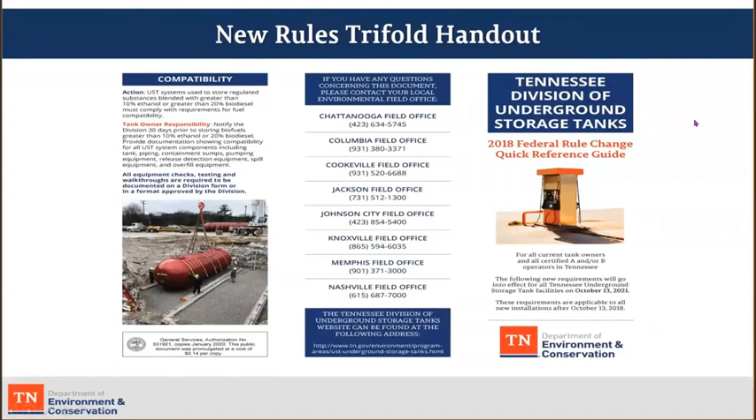We also created - you may have been handed out one of these during an inspection, or we're seeing this one too - it's a trifold handout. It was just kind of hitting the points of what's new and what your requirements are. I know you can't read that, but if you want a copy of this, we'd be happy to give it to you. It's also under the new rule tab on our website.

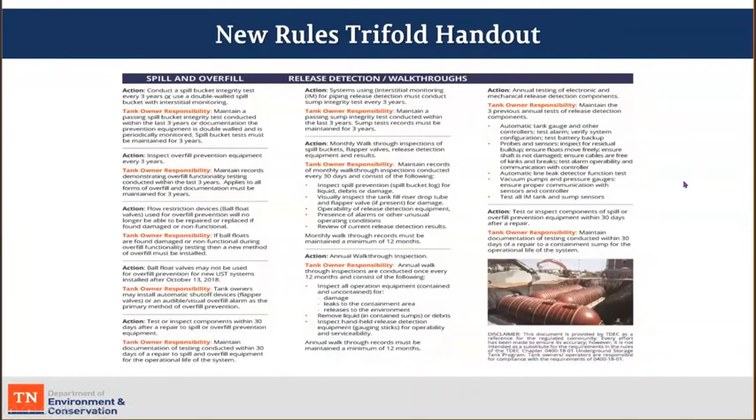Before we get started going through any pictures, we have to say a disclaimer: the State of Tennessee does not endorse any specific brands, manufacturers, vendors, products, or services. So anything we're using, for example, is just an example. We're not putting our name on it.

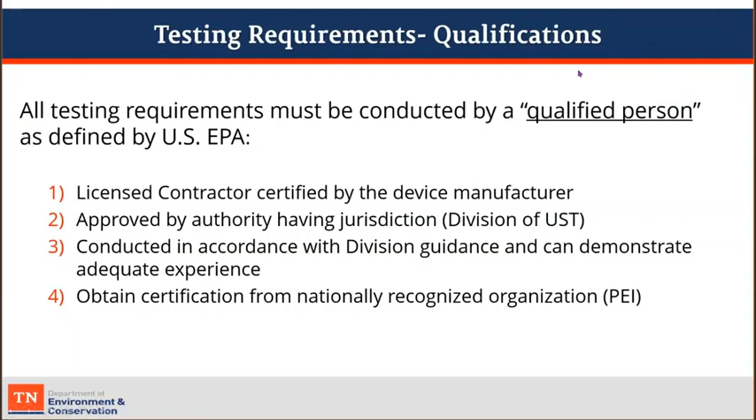All the testing we're going to refer to, all the new testing requirements, the qualifications for the person to do the testing - it must be conducted by a qualified person. That's defined by the US EPA as a licensed contractor, certified by the device manufacturer, approved by the authority having jurisdiction - that would be us, Division of UST in Tennessee - conducted in accordance with division guidance, and can demonstrate adequate experience, or obtain certification from a nationally recognized organization. PEI is an example, Petroleum Equipment Institute.

So, spill and overfill prevention devices - what is new? For spill prevention equipment, your monthly walkthrough inspections were already kind of like a monthly spill bucket inspection. There are some new items added to that for the complete monthly walkthrough inspection. There will be 3-year spill prevention equipment integrity testing. For overfill prevention equipment, there's also a 3-year overfill equipment functionality testing requirement.

For record-keeping requirements, briefly: the monthly spill prevention device, spill bucket walkthrough inspections, will be maintained for 1 year. For the 3-year testing for spill and overfill devices, those will be maintained 3 years. So you'll keep it for the 3 years, then you're doing another test and you maintain that one for the next 3 years. For double wall spill prevention equipment, monthly monitoring results must be maintained as long as this method is in use.

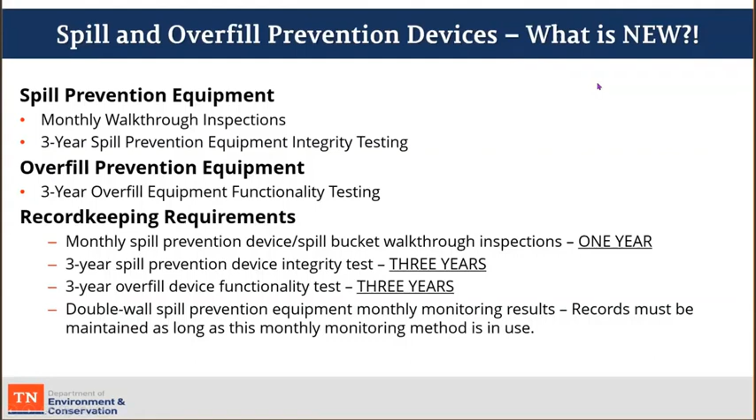For review, your spill prevention equipment is required to prevent the release of product to the environment when the transfer hose is detached from the fill pipe, catching any drips or small spills that may occur during delivery. The spill bucket must be installed on all USTs with a product transfer volume greater than 25 gallons at one time. This equipment is not manufactured or designed to contain petroleum product for long periods of time - it's just to hold that spill until it can be cleaned out.

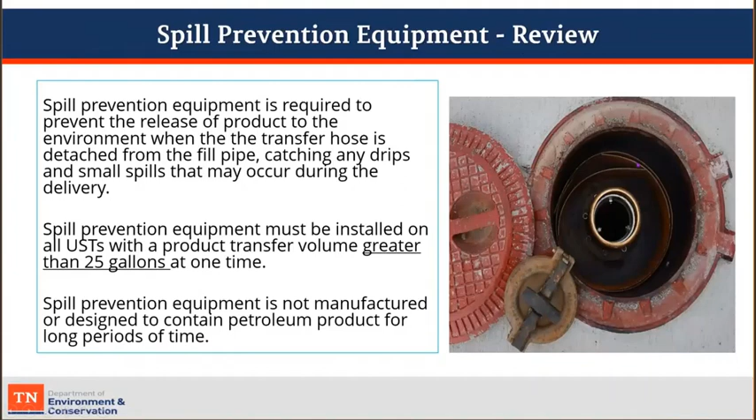Another example is an all-in-one STP sump as your spill prevention equipment - it may not just be a simple spill bucket. In this one, your fill port is actually located with some transition piping here, and it looks like your tank probe is in there too. So this entire sump would be considered the spill prevention device.

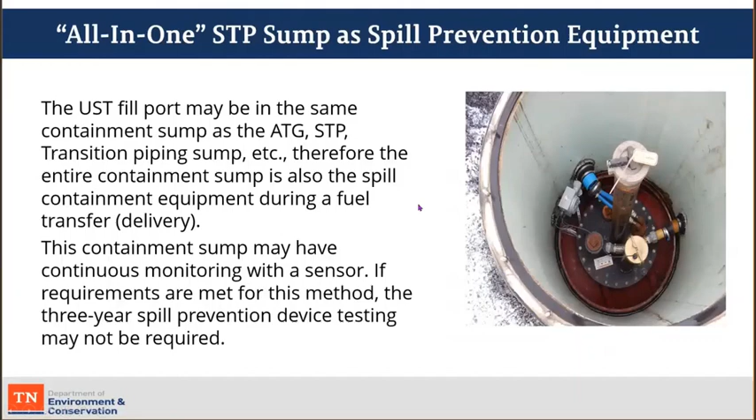This is some alternative spill prevention equipment. Different sites, different types of facilities, this may be the type of equipment they need to use. This one is in a vault. These are like a bermed area, a bermed surface area around the fill area. They must be compatible with the stored product and not allow a spill to be released to the environment. Monthly inspections are required for this type of alternative equipment, and any damage must be repaired or replaced.

And this is important. These might be located near something like an oil water separator, maybe at a truck stop or a bulk plant, or storm drains. These might contain less and be more of an opportunity to become a pathway for any spills or overfills to get into the environment.

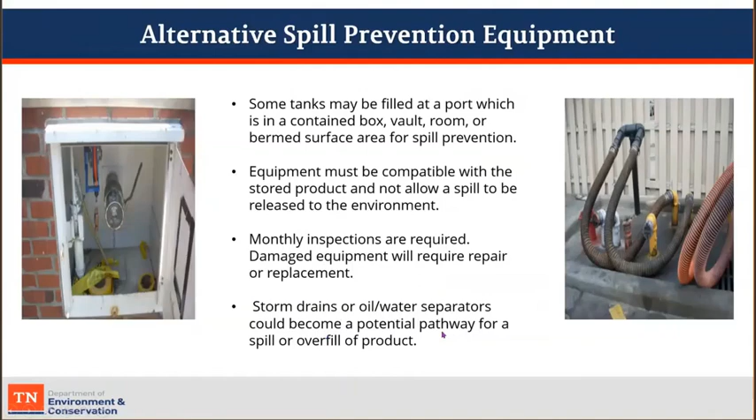Another type is the spill bucket. They have a drain back valve, so this drain is installed. The intent is, if product from the hose is in the bucket after the delivery, you could drain that product back into the tank instead of having to remove it another way. But if the spill bucket is not maintained clean, with no debris and no water, that can cause problems with water getting into the tank. And they should not be used, especially for fuels that contain ethanol. The potential for water to enter your tank could lower the quality of the fuel.

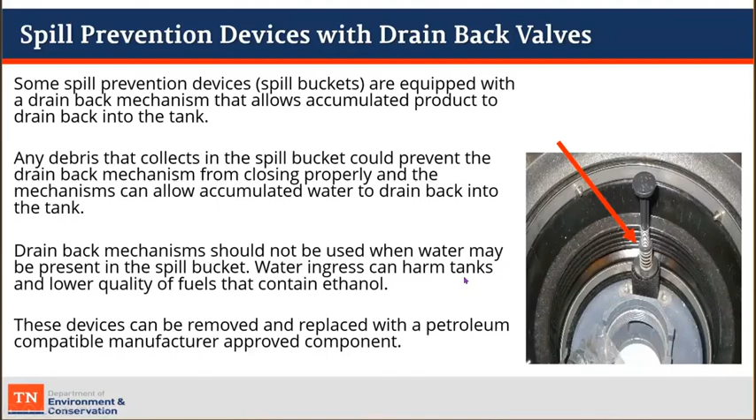For repairs, these can be removed and replaced with a device, a petroleum compatible approved component by the manufacturer. So kind of like a plug. But once it's plugged, it has to stay plugged. You can't take it out, plug it to test it, and put it back in.

So for the monthly walkthrough inspection, a new requirement for all spill prevention equipment, you will be visually checking them for damage, removing all liquid or debris. You're going to actually look down in the fill pipe and check for any obstructions, say a stick might be down there to bypass an overfill device. Just make sure there's no obstruction, and you'll be checking your fill cap. Make sure the seal is on it, it has a tight seal, and it sits securely on the fill pipe.

And for the double wall spill prevention equipment, if it's interstitially monitored, you want to check for a leak in the interstitial area, and that's done monthly.

So for the record keeping on the monthly walkthrough for spill prevention equipment, it's going to show a list of each area checked, so each spill bucket, maybe by product, whether each area checked was acceptable, or if it needed action taken. You're going to describe the action taken, say there was water, I removed the water. For double wall spill prevention equipment, you'll keep maintaining the monthly sensor status and the monthly alarm reports if it's monitored with a sensor in the interstitial space.

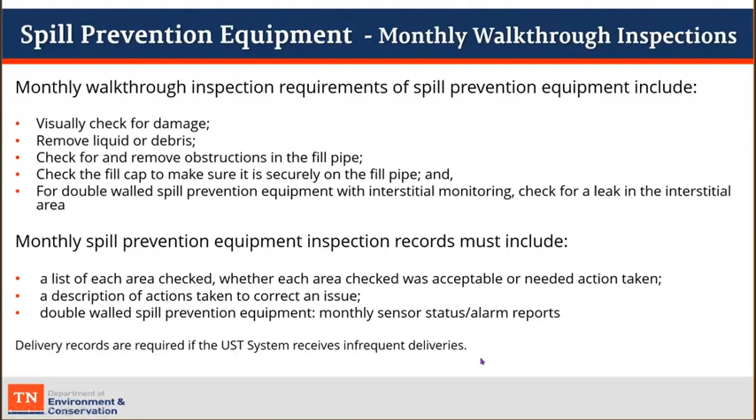The 3-year integrity testing on spill prevention equipment: single wall spill prevention must be tested at least once every 3 years to ensure the equipment is liquid tight, by using vacuum, pressure, or liquid testing. And the liquid testing is the most frequent, it's a hydrostatic test.

Double wall spill prevention can be visually inspected every 30 days or monitored with an interstitial sensor. The visual inspection would be, some of them have a little gauge, like a vacuum gauge at the bottom, you could visually look at that every 30 days, or you're going to use that sensor for continuous monitoring. Again, records for the double wall spill prevention monitored with that sensor must be maintained for as long as the equipment is in use and using that method. So we'll be looking at the monitoring records and documentation that the manufacturer's spill prevention device requirements are met. If you choose to discontinue sensor monitoring of that double wall spill prevention device, you must conduct the integrity testing within 30 days.

Yeah, I have a question. Okay.

This is from David McCaney. There was a comment about the spill basin drain: if plugged, could not be removed to test. I didn't understand that reference.

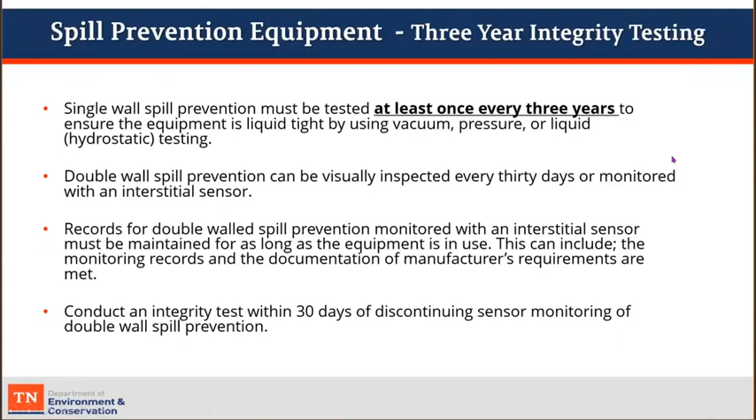For the hydrostatic method, which is the most common method of testing the spill prevention equipment, these instructions are from our division's technical chapter of our standardized inspection manual on spill and overfill prevention. Other testing can also be conducted in accordance with the PEI, Petroleum Equipment Institute, their RP 1200, Section 6.

The method would be: before testing, you're going to need water, a tape measure or measuring stick capable of measuring to 1/8 of an inch. You might want to use spray paint or a marker so you can see where you marked. You must clean out the device, make sure it's empty, very clean.

Make sure any drain valves are completely closed. If it doesn't seal properly and you know it, that's where you could repair it, or remove it and just not use that drain valve. But if you want to keep it, you have to repair it and test it with the drain valve installed. Those are a common place for a failed test—they could have debris under it causing problems.

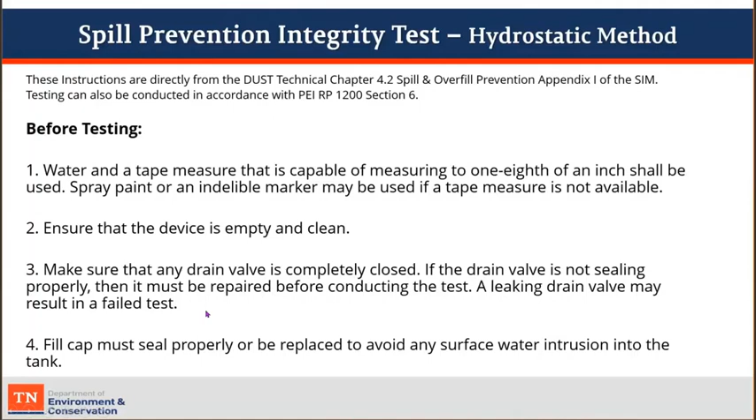Your fill cap must seal properly. That's important—got the seal tight on top of your fill port. You want to be sure to replace that if it's not, to make sure none of the water gets into your tank during testing and in the future.

For conducting the test, you're going to mark inside the spill bucket a level just slightly below the top of the cap on your fill riser. Fill the spill bucket to that level with water, and allow that water to stand for a minimum of 1 hour. After that hour, measure the difference of the water level using your tape measure, to the nearest 1/8 of an inch. Then empty and clean the spill bucket.

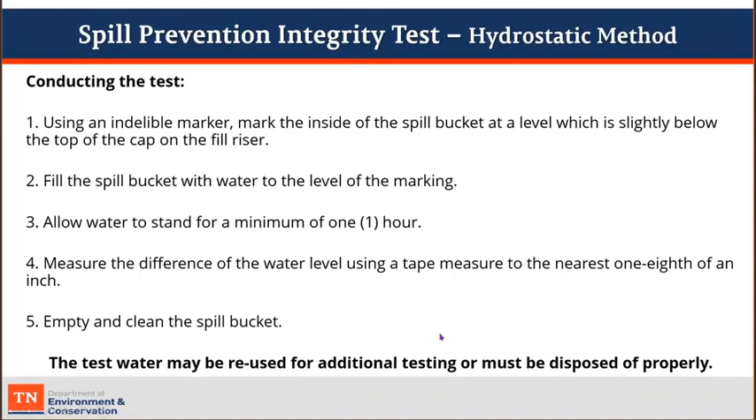The test water can be reused on site, or it must be disposed of properly. If the water level decreases by 1/8 of an inch or more, the spill bucket fails the test, and at that point you determine if the spill bucket can be repaired—manufacturers have that in place. If not, it must be replaced. If the water level change is less than 1/8 of an inch, the spill bucket passes the test.

The division has a form for our spill prevention device hydrostatic test report, Form CN 1366. That's just a picture of it, but it's very small. If you'd like to have the form, it's on the website, or we'd be happy to email that to you.

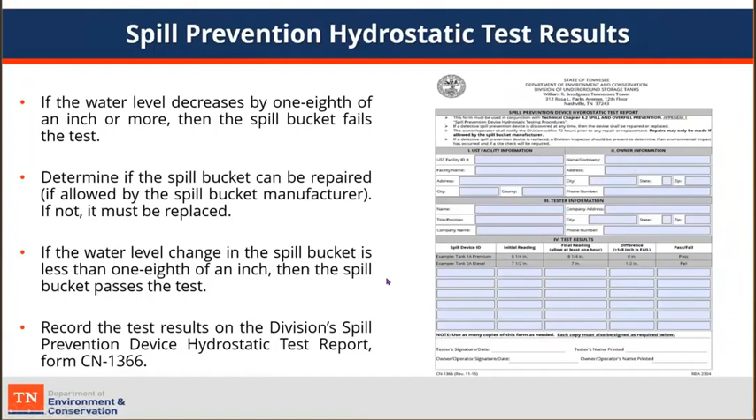Another method for the vacuum method, this is less common, but it can be done on a single wall or double wall. The device manufacturer has the vacuum testing kits. You definitely want to get with the specific device manufacturer for their procedure and their test times.

PEI has some standards here for single wall spill bucket: your initial is 30-inch water column, your end result 26 inches or greater is a pass. So that's their tolerance. For the double wall, the initial is 15 inches water column, end result of 12-inch water column or greater after 1 minute is a pass. So this is a faster test, but it takes a lot more equipment.

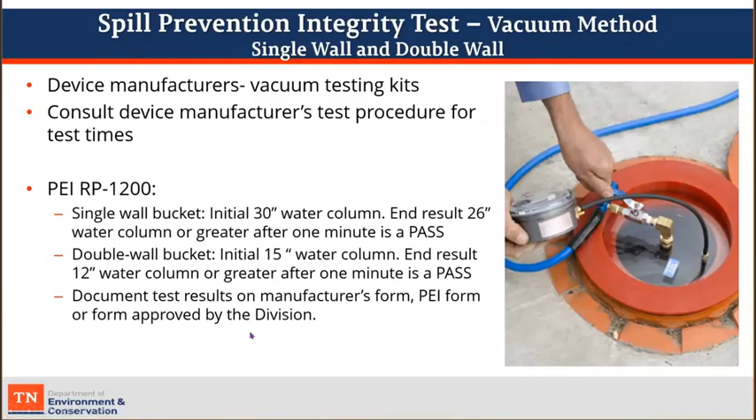And you document your test results on the manufacturer's test form, a PEI form, or a form that is approved by the division.

As far as repairs on spill prevention equipment, some spill bucket manufacturers allow spill bucket retrofit repairs. There's some that are being manufactured now, so in the event you do have to replace or repair, it's just got that inner wall, you can just take the inner wall out and replace that. That way you don't have to break concrete to replace the entire spill bucket.

And if you do repair, it must be fuel compatible, no field applied coatings or patches, no flex seal. You're going to check for UL approval, or contact us to make sure what repair you want to do, and we'll let you know if that's going to be approved. After any repairs, the spill equipment device must be integrity tested within 30 days of the repair.

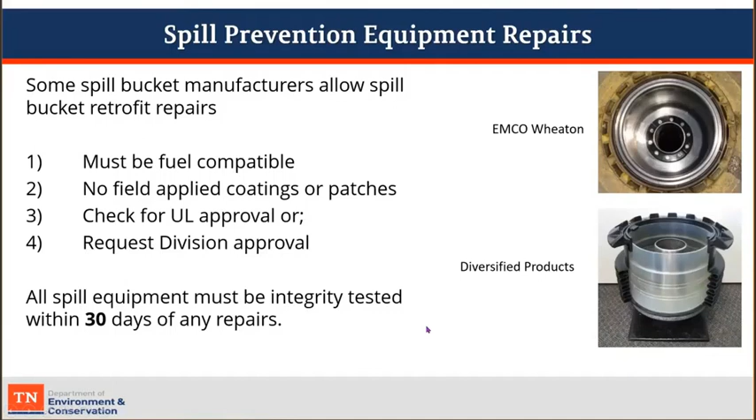Also, if you want to look up other types of methods to test the spill prevention devices, the National Work Group on Leak Detection Evaluations, you can always check this to make sure any test methods are approved, not just for these but for tanks, everything, leak detection. This is a great resource to see what the approved methods are and what the requirements are for that method.

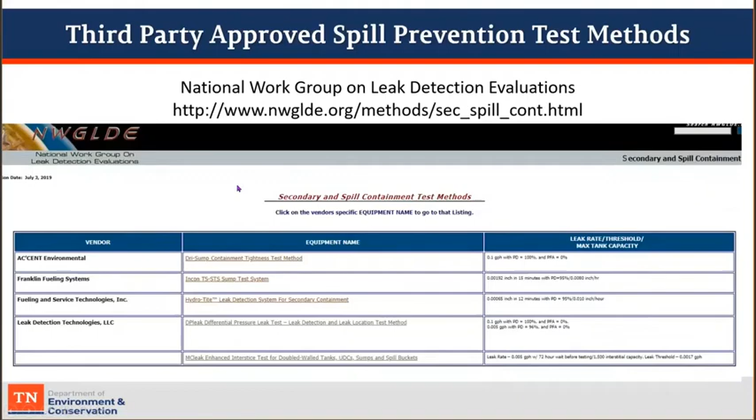For record keeping, once you have this equipment testing, the 3-year spill prevention equipment testing, you're going to maintain that test for 3 years. The records for the double wall spill prevention monitored with that sensor must be maintained as long as that equipment is in use. The owners and operators must conduct an integrity test within 30 days of discontinuing that monitoring with the sensor. And any repair documentation must be maintained for the life of the equipment. The post-repair integrity testing must be maintained for 3 years until the next 3-year test.

Mitzi, I have another question from David.

If a site has a double wall spill basin, will the state of Tennessee require both primary and secondary testing, or will the primary be the only test required?

If you're monitoring the secondary with the sensor, then you don't have to do the 3-year integrity test.

So if it's being monitored with a sensor, what if the site is being monitored periodically? In other words, you have an individual that's doing the monthly inspection and they're checking that gauge every 30 days. It's exempt from the 3-year test, correct?

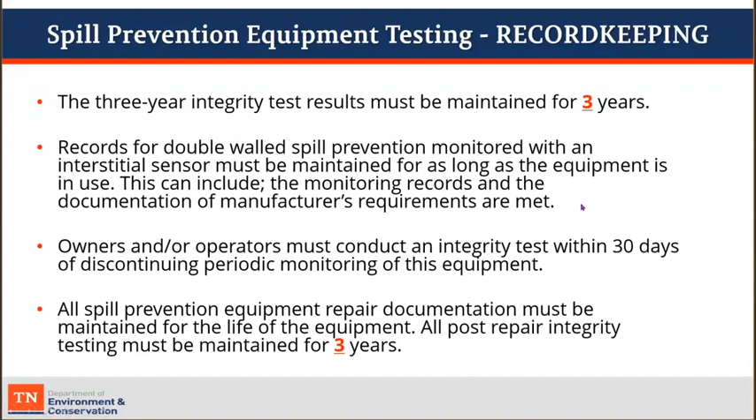Okay, for spill prevention equipment repair and replacement, this is when to contact the division. If it's been replaced just as preventative maintenance, you want to go ahead and replace all the spill buckets at your site, or you're redoing your parking lot, that type of thing. You don't have to report that unless you encounter contaminated backfill material.

The failure of your 3-year spill bucket integrity testing is not reportable. But if the device is not repaired or replaced within 30 days of the discovery of the failure, the division needs to be notified — that would be a violation. If the device is replaced and you encounter contamination in the backfill, that would be reported to the division.

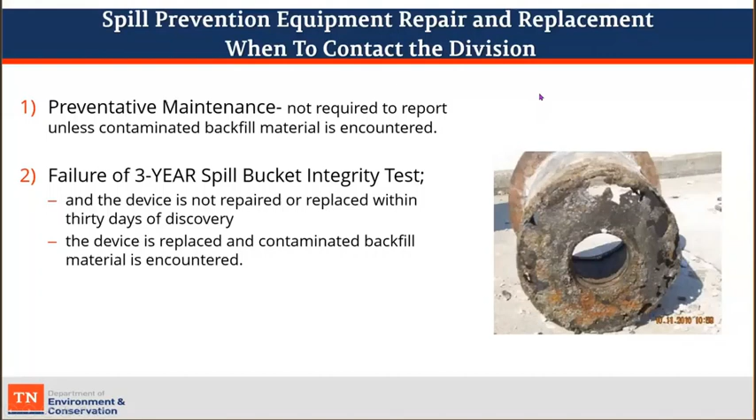Again, when to contact the division, when to replace: if you see obvious damage, you're going to replace that. You might not even test it first, but you'd want to verify that it is a fail. For contaminated backfill, if you encounter something obvious visually or by smell, you're going to contact the division and report that. And when to test — after a new installation, you're going to do an integrity test at that time.

Failure to repair or replace a defective spill prevention device is a violation, an unusual operating condition. The devices must be repaired or replaced immediately, within 30 days, or as required by the division.

Within 30 days — lately there's been a lot of delay on equipment, and a lot of reasons it's taking longer to obtain equipment and get the work done. So just be in touch with the division, document with invoices that it's ordered, it's on the way. It may take 2 months, it may take more. That needs to be documented, and the division needs to be aware of why it wasn't repaired or replaced within 30 days.

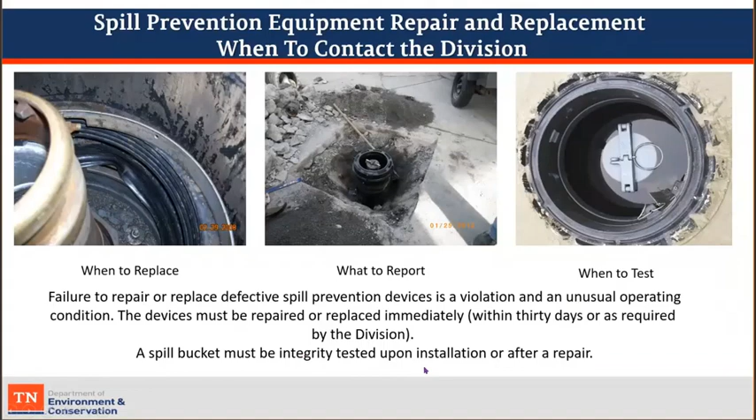And spill and overfill reporting — this is the 25-gallon rule, which we put in here just as a refresher. A spill is fuel released to the surface of the ground during the transfer of petroleum to a UST system. An overfill is fuel released during the transfer of petroleum by filling the UST system over its capacity.

Let me just add one thing to this slide. I think it's important to note that the 25-gallon rule only applies to incidental spill during fuel transfer. In no way, shape, or form does it imply that there's a limit assigned to spills from other parts of the petroleum system — those are not part of the 25-gallon rule exclusion. So I just thought I'd throw that in there. Like overfilling a car at the pump, that's not included here, or a leak from a fuel component, a line, or a dispenser — it only involves fuel transfers.

This is directly for spill prevention, overfill prevention — it's all related to the delivery of the fuel. So if, say, your spill bucket or hose didn't hold the amount that was in the hose, it escaped from the spill bucket.

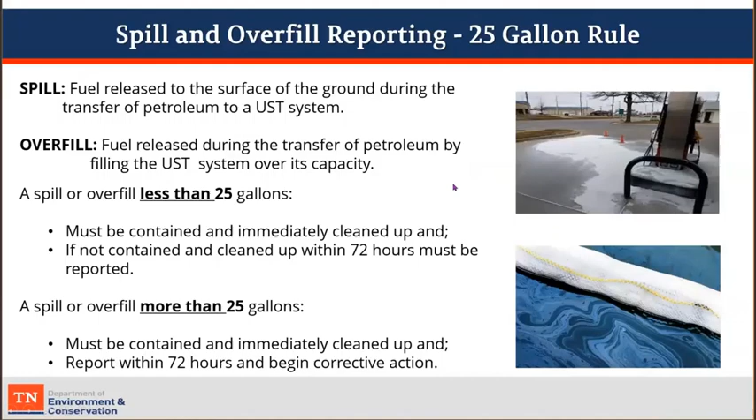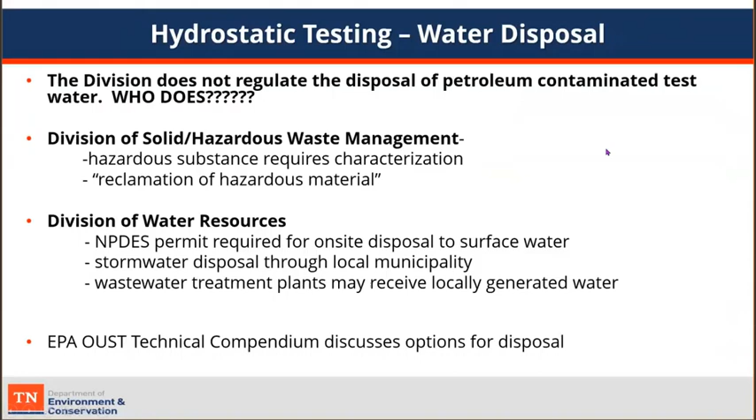Of course, water disposal — when you're doing the hydrostatic testing, you're putting it in petroleum equipment that's been in contact with the petroleum. So what's the proper disposal of that water? We don't regulate the disposal of your test water. Who does? You can contact us, and we can put you in touch with a contact person within the Solid and Hazardous Waste Management Division or our Water Resources Division, depending on where you're located. There are different opportunities for disposal with the Water Resources Division, but it's going to be site-specific. So if you have questions about that, you probably want to give us a call or give one of them a call and discuss it with them.

Well, where did you go? Oh,

That's weird. Okay, well, we'll go to overfill prevention equipment. If you have any other questions about... oh, what?

Yeah, Mitzi, this is Mark. If I could interject, the easiest way to get in touch with those divisions is to call your local field office. We have 8 field offices located throughout the state that most of you have worked with in the past, but the easiest way to get in contact with those resources is through the local field office.

Thanks, Mark. Yeah. All right, if there's any other questions on the spill prevention equipment, testing, monthly walkthroughs, anything about that before we go to overfill prevention? I'll move on, and of course, ask as you want to. Sure, Mitzi, there's no other questions in chat or the Q&A right now, but thank you. Okay, well, thanks, Mark.

Overfill prevention devices are installed in the UST to help prevent the tank from being overfilled during a product delivery. There are 3 different types of overfill prevention devices. One is designed to stop product flow, reduce product flow, or alert the delivery person during the delivery before the tank becomes full and product is released into the environment. The stop product flow we refer to as automatic shutoff devices, flapper valves; the reduction of product flow restriction devices are our ball float valves; and the overfill alarm, which alerts the delivery person, is a high-level audible or visible alarm. Just a couple pictures of the 3 different kinds.

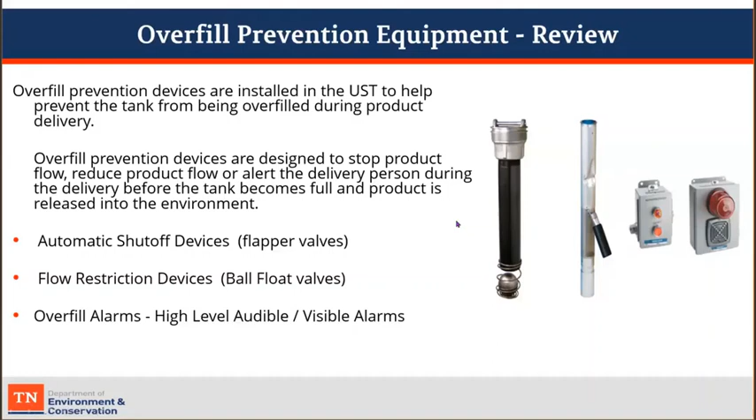And just a little note, I think... oh, go ahead. If I could, I guess, sorry to interrupt you. No, you're good, no problem. We actually did have a question hiding under one of my tabs.

Okay, from Brittany Boxer: are site check soil samples post spill bucket replacement required? If so, do they need to be submitted to the division, or can they be provided to the state inspector prior to inspection? Did you say site check? Are site checks or soil samples post spill bucket replacement required? That's one part of the question.

Okay, well, that would be, if you encounter contamination or suspected contamination during the removal, that's when you notify the division, and we would give you guidance on the next step, whether a modified site check would be required or sampling the backfill. You're going to report it to us, and we'll let you know what the next process would be. So, but it's not routinely required. Yeah, but if you observe something more than incidental contamination, of course you're going to run into some incidental contamination at most spill buckets. But if you suspect there's been a more significant petroleum release, then yes, contact us and we'll give you the proper instructions from there.

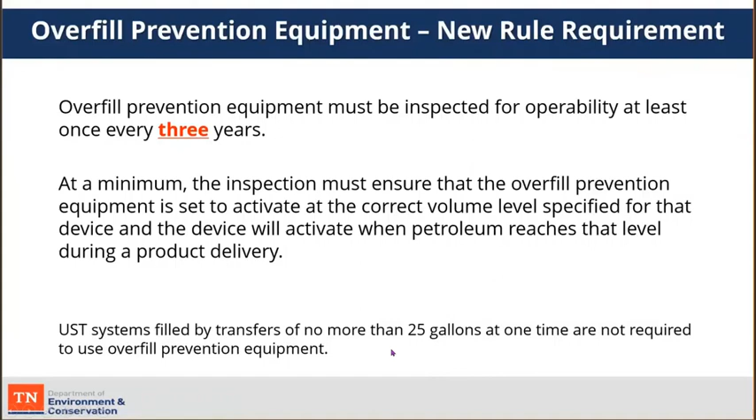Just a note on the spill and overfill prevention equipment requirements in general. For UST systems filled by transfers of no more than 25 gallons at one time, they're not required to have spill or overfill prevention equipment installed. That would really just generally be a waste oil tank that's not getting a transfer greater than 25 gallons.

For overfill testing, tank charts are important. They're required as part of the calculations for your overfill device testing. If you don't have this available at your site, or the tank owner says he doesn't have a tank chart, they can be created or found. Tank manufacturers, Steel Tank Institute, Xerxes, CSI, they maintain these records for warranty claims.

Steel tanks can be measured vertically, and estimated length to generate a tank chart, or if you're using a monthly inventory and an SIR vendor, you can eventually build a tank chart with all that inventory, flow through, and delivery information. STI can almost always provide an accurate chart for any size steel tank, and there are some websites for creating a tank chart based on the information you have. It's important that you're always going to be able to create or find your tank chart for that specific tank.

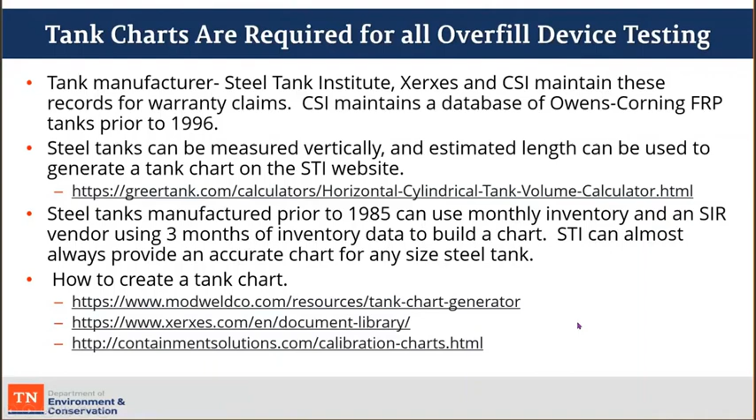Simple overfill device calculations for overfill alarm and ball floats: since they're 90%, you're going to find on your tank chart the actual total tank volume. When tanks are installed, or when a notification form is submitted, they usually just put 12,000 or 8,000 gallons as a round number, but no tank is actually just a round number. So the tank chart, you're going to find that actual total tank volume on the tank chart, or in that automatic tank gauge, which is programmed based on the tank specific information.

So that volume, you can use that too. You multiply that volume by 90% off the tank chart, and then you use the inches measurement to find out what that 90% is. And pretty much the same for the 95%, the shutoff valves. You're using the same thing, but making sure that it's 95%.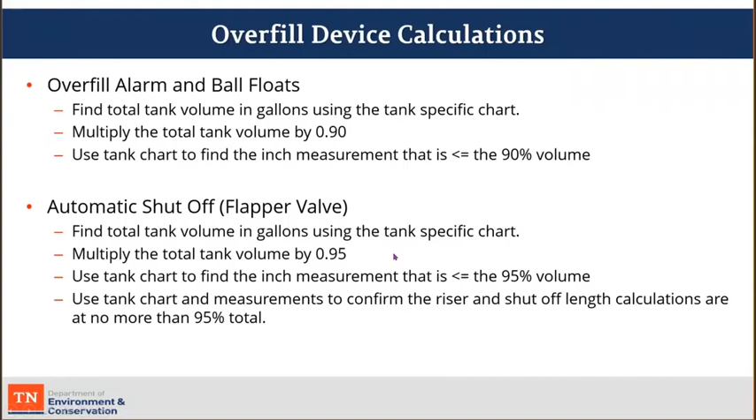The automatic shutoff devices are down in the fill riser, called flapper valves, flappers, and it's all part of your drop tube. They're designed to initially restrict and then shut off the flow when the product has reached 95% during the delivery of your tank. So you're going to always have that 5% at the top empty.

Automatic shutoff valves need to be properly positioned and operate properly. The purpose of the operability inspection is to verify that it's installed properly at the proper height in the tank, and that it's going to operate as designed and shut off that flow so your tank does not get more than 95% full during a delivery, to prevent an overfill.

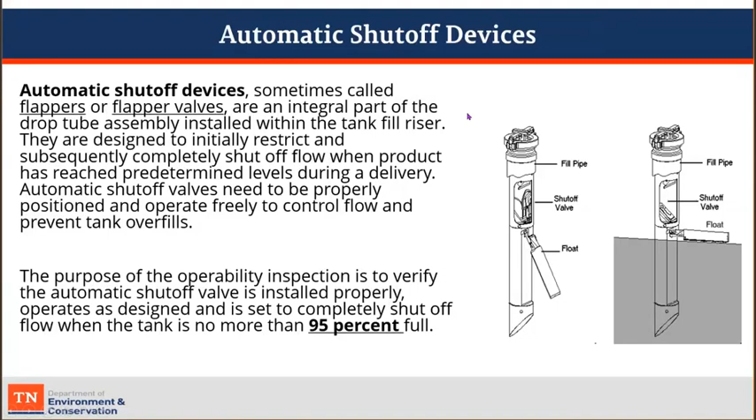There are different manufacturers, and the different manufacturers have different settings on the way that they operate. So you might have a restriction setting, the initial setting, before it actually closes off to shut off the flow of product. You could find out from the manufacturer, but we can help you find it. If there's any questions in the field about what you're looking at and what you need to do, we can get you that information.

That first restriction just allows some of that product that's in the hose to be drained into the tank before the tank reaches 95% and it's shut off. That just gives it a little more cushion before 95% occurs.

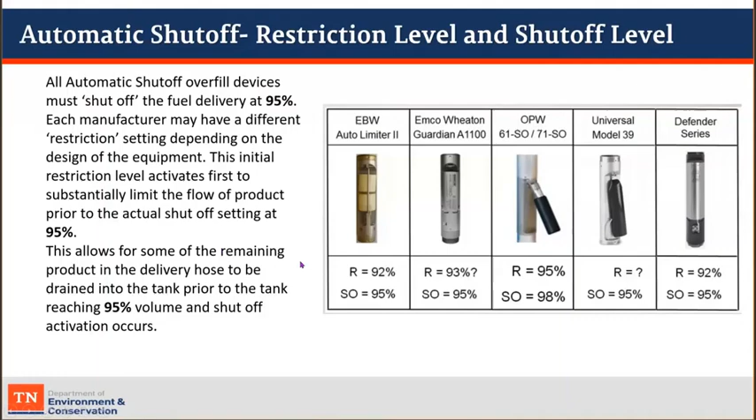For the operability testing, the drop tube is going to be completely removed from the riser. So visually inspect the shutoff valve, the floats, the whole device. Some work differently. Make sure there's no damage or any type of corrosion that's going to inhibit the function. Remove any buildup and debris. Manually verify the float moves freely so that it's going to rise as the product level rises. There's the bypass valve, make sure it's open.

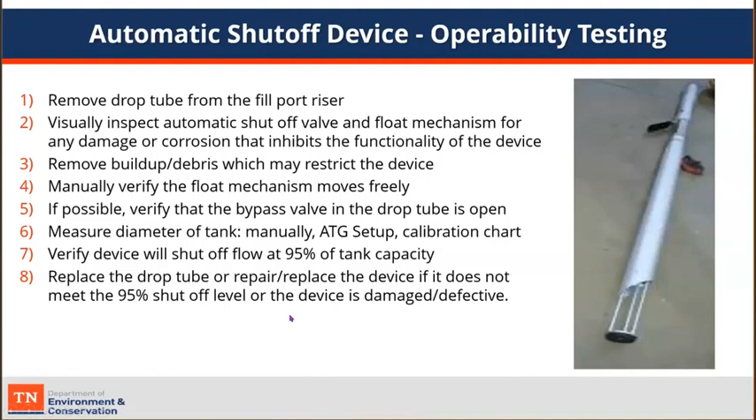You're going to go through the calculations of measuring the tank, using the tank chart or the ATG setup information, and do your measurements to make sure and verify that device is going to shut off the flow at 95%, so the delivery will not go above 95% of your tank capacity. If there's any damage, or it's not operating as designed, the device is damaged or defective, it has to be replaced, and you'll do an initial operability testing for that new device.

There is self-testing. There are several self-testing types of devices, marketed as not having to be removed, so you could just self-test it. The division does not approve these devices for the operability testing. You can install it, but we will still require it to be removed and visually inspected and calculated to make sure it activates at 95%.

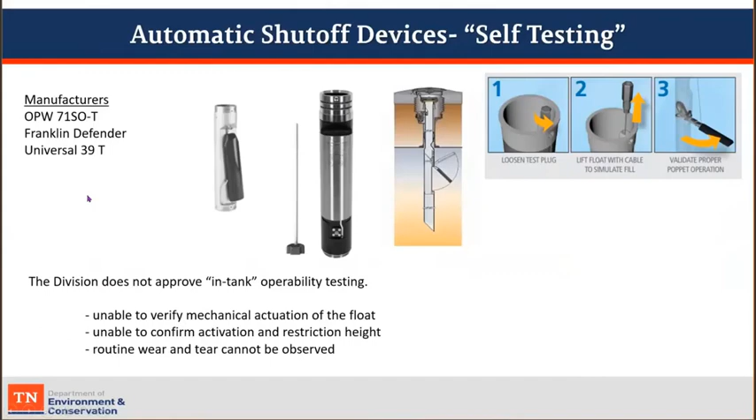For the second type, audible, visible, high-level alarms, using that as an overfill prevention device. It's kind of a two-part outdoor device. It can be, like in the picture, a light, a speaker. It can be audible or visible. Most of them have both, and that's great. It's better to have both. And they're really loud.

So it has to provide an audible or visible warning to the driver once the product level in the tank reaches 90% during a delivery. It requires a probe and part of your ATG system, so it's a setting. Once that probe floats up, it lets the ATG know, and then it triggers that alarm. It has to be located near where the drivers are dropping fuel.

It's not a mechanical device, it doesn't help to reduce or stop the flow. It's simply an external method of alarm. The purpose of testing this, the operability inspection, the 3-year test, is verifying that the alarm is operating correctly, that the light works, and that the probe is set at the correct calculated 90% volume of the tank.

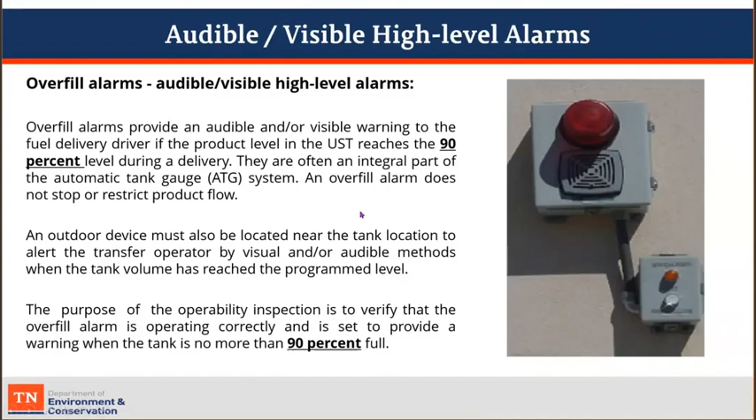This is a PEI process procedure for overfill alarm device testing. I don't have to read through the whole thing, but you're just testing it against your programming in your ATG and checking that the floats are operating properly.

You have to take the probe out. You have to actually make an alarm, see where that float alarms, check your ATG for what level that is. This is after you've done your tank chart calculations, so you know exactly what that level should be for that particular tank.

Yeah, got it. And one of our folks said they lost all audio. Can the rest of you hear, panelists, can you all hear? You could send me a note in chat or Q&A. Yeah, I can hear everything fine. Okay, Don, you good? Okay, looks like, oh okay, great. It looks like maybe that was just an isolated thing, maybe on their phone or something, or like you said, the bandwidth. Maybe somebody had lower bandwidth. Okay, well I just thought I'd check. Yeah, we'll continue on.

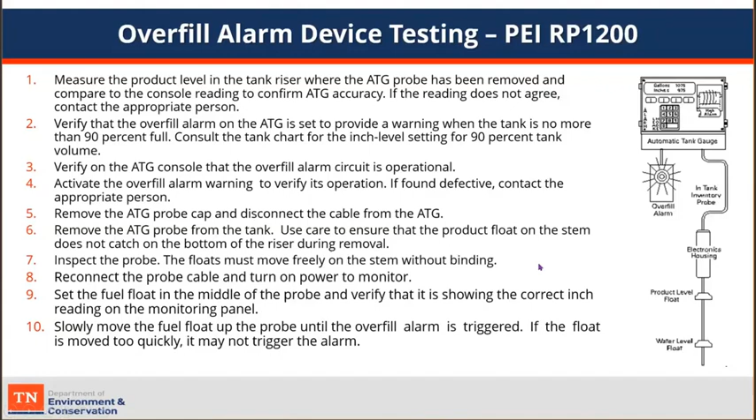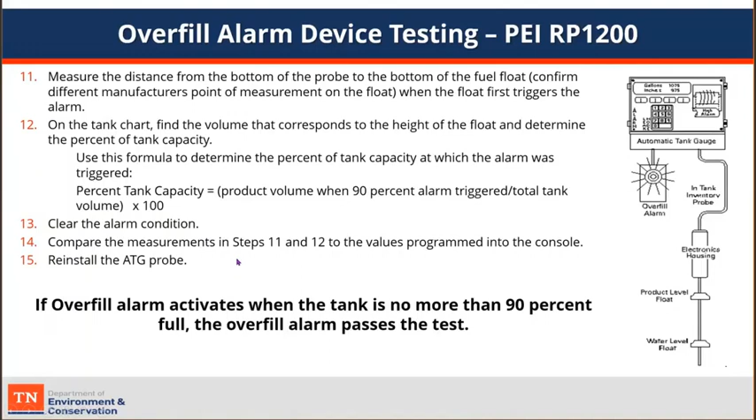Okay, we already covered that. But attach the electronic alarm printout, which you're usually going to have, showing that it alarms at the proper level for 90%. And you'll have a form to submit with the calculations and the tank size, 90%.

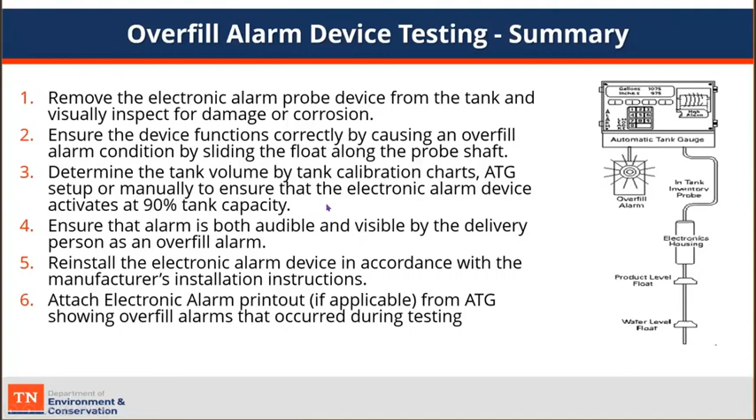The third type, flow restriction devices. These are our ball float valves. This is located inside the tank, where the vent line exits the tank, so it's kind of part of your vent line system. It operates by restricting vapor flow out of the tank as the tank is filled during a delivery.

This is required to be set at 90%, so your delivery will not fill the tank over 90%. As your tank fills, and once it reaches this point, the ball in the cage in the picture will rise up and seal. It will slow the rate of that delivery pretty noticeably, and the driver will be able to notice. Usually the hose will jerk, something like that, and he'll know to stop the delivery.

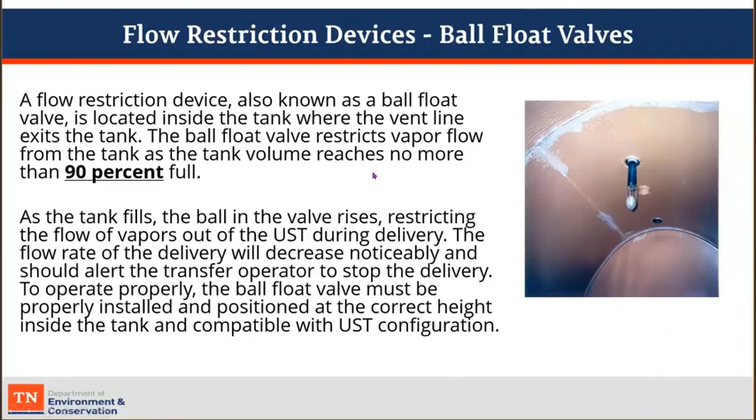And it's very important that these are properly installed, positioned at the right height, and compatible with the type of UST piping. There's a lot of requirements for these.

To function properly, all the ball float valves and tank top fittings have to be vapor tight, so the only vapor escaping the tank is through that vent line. Also, they can't be used for suction piping.

If the tank is overfilled, fuel could be released at the dispenser. They can't be used for pressurized deliveries that could overpressurize the tank, for remote fills, or with coaxial stage 1 vapor recovery.

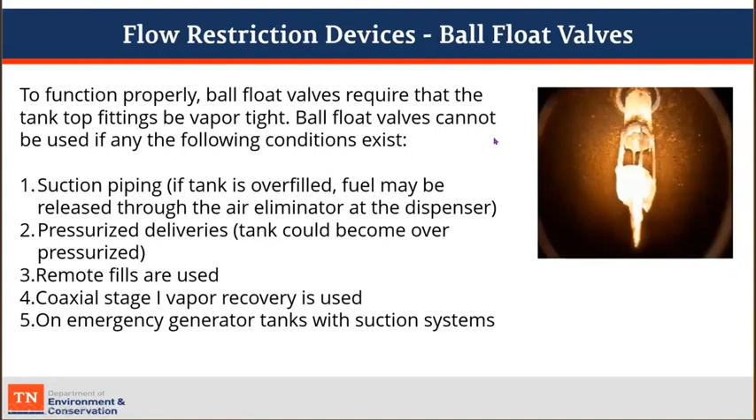And on emergency generator tanks with suction systems. For testing, the flow restriction devices will be removed from the tank, and this, I'm sure everyone's aware, has been very difficult to do, even when you have good access to it. They've just been in there a while, and they're hard to remove, but you have to, in order to test it and do your 3-year testing, it has to be removed.

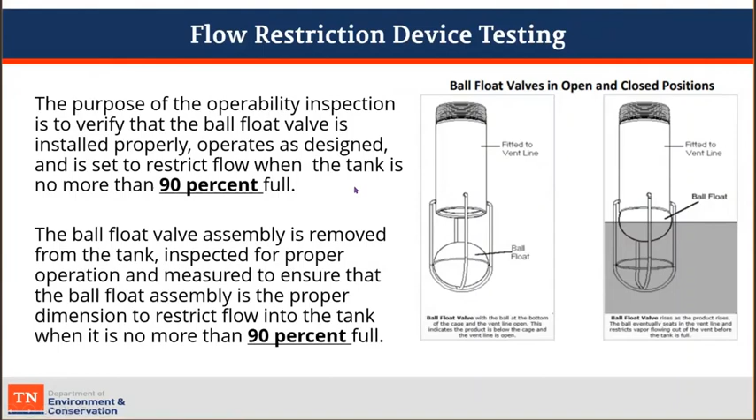You're going to do your measurements, verify that it is set to restrict the flow when the tank is no more than 90% full.

Here's a good picture of it removed. You're taking your measurements, of course measuring the piping device, checking on where it's going to restrict the flow of the vapors from the tank.

You're going to visually inspect the ball float in the cage, make sure the cage isn't corroded, make sure the ball's intact, and make sure it all flows and works inside the cage.

You're checking on the vent orifice in that vent restriction pipe, which has to be open and located near the top of the tank. That's just kind of a slow release, so you're not pressurizing that tank.

Use the ball float manufacturer's installation procedure to determine and make sure that it's installed properly.

And here's the important part for ball float valves: these are being phased out. If it does not function as designed, it can't be repaired and it can't be replaced. Once it fails your 3-year operability test, they can't be repaired, they can't be replaced. You have to use another method.

So you'd be installing the automatic flapper or the high-level alarm, audible visual alarm, and you'd be removing this ball float from the tank.

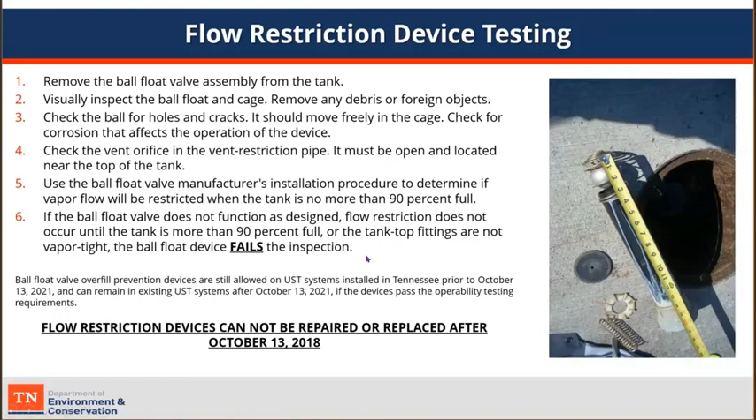And overfill equipment devices, operation and testing: tank compartment ID, tank size, tank material. This is for all 3 types. It's very important you actually have the correct knowledge of what type of tanks and sizes of tanks are on site. You can always check with the division on what's been registered at the facility. If anything's incorrect, then we need an amended notification form updating that equipment.

Even if you're using the tank calibration chart, the ATG setup, you still need to do some physical measurements on site. If multiple overfill devices are installed, all those devices must be operability tested.

So if you have a flapper and a high-level alarm, both of those have to have a 3-year operability test. If you have an automatic shutoff device with a flow restriction, the flapper must be installed to activate below the ball float.

And there's times when that ball float may not be accessible and hasn't been removed. They just put in the flapper. It needs to be set at 90% or below. Hopefully you can verify where that ball float is set or remove it from the equation.

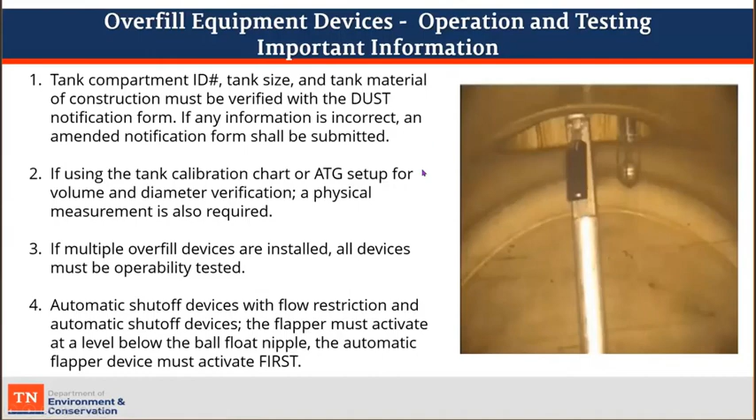Record keeping for overfill prevention equipment testing: the 3-year overfill prevention equipment test must be maintained for 3 years for all equipment devices. It's a 3-year test. You maintain it for the 3 years, then you do another test in 3 years.

Just to reiterate, ball float valve overfill prevention devices could be installed prior to October 13th, 2021, and could remain in existing systems after October 13th, 2021, if they pass the required operability testing requirements. They cannot be repaired or replaced after our effective date of October 13th, 2018.

Yeah, I do have a question. If I could interrupt you. David McCamey has a question, I'll try to unmute him. Okay, here we go, David, go ahead and ask your question. Sorry, I had to put my mic down. I apologize. No, you're good, I hear you.

You answered a question I was sitting on waiting for, regarding verification of the ball float. If the ball float could not be verified and a drop tube device is installed, you want the second stage shutoff below the potential 90% of the previously recorded ball float. My question stems from the fact that many operators use their ATG for ordering fuel, based on the 90% programmed in the ATG for remaining ullage. Is the state of Tennessee going to require that the ATG also be programmed no longer at 90%, but to the second stage shutoff recorded by the compliance tester at the location?

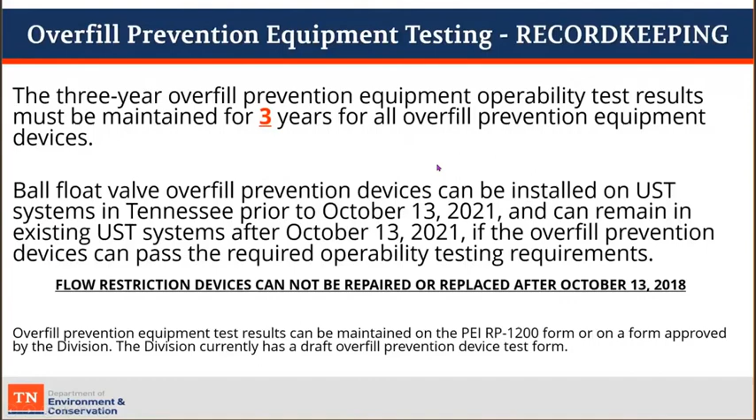There are some new rule requirements in regards to temporarily out of service tanks. These weren't part of our October 13th, 2018 rules. These were actually in effect June 15th of 2021. Just to review, this is our definition by rule: a UST system is empty when all materials have been removed using commonly employed practices so that no more than 1 inch of residue remains in the system.

Your general TOS requirements: if cathodic protection is installed, it must remain operational. So the 2 most recent 3-year cathodic protection tests must be available, and the rectifier must still continue to be inspected every 60 days with the log maintained. If tanks are TOS for longer than 3 months, all the pumps, lines, manways, and ancillary equipment has to be secured. If the TOS UST system is empty, no monthly release detection is required. If the UST system has greater than 1 inch, then release detection must be performed.

The new requirements relating to spill and overfill prevention equipment: TOS UST systems are required to have the spill and overfill prevention equipment installed, even if they're temporarily out of service. If the TOS UST system is empty, then the 3-year spill and overfill device integrity testing is not required. This testing will be required when the tank has greater than 1 inch in the UST system. So those are just 2 encouraging reasons to keep that TOS tank empty, to avoid doing release detection and avoid doing the 3-year spill and overfill device testing.

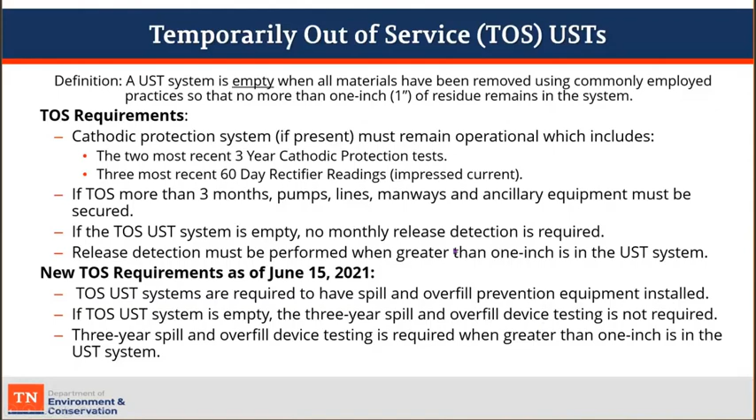And Dawn, I think you were going to talk about this one. I wanted to, before though, just make sure these 3-year tests have to be conducted on all of our Tennessee facilities before October 13th of this year, so we're getting real close to the deadline. And I know all our service providers are really, really busy right now, trying to get them all done. And there's always people that wait till the last minute, and I don't know if they'll actually get it done in time if they do.

Thank you, Mitzi. I just wanted to take a few minutes here and discuss this. I don't want to keep this over, so I'll be brief.

We shared this information with the owners as well, just as an educational reminder, and I thought we'd do so here too, that the fiberglass tank industry, not only the industry but their representatives, PEI and the Office of Underground Storage Tanks with EPA, have all given specific recommendations for the use of ball float valves, particularly with fiberglass tanks. The manufacturers are represented by the Fiberglass Tank and Pipe Institute.

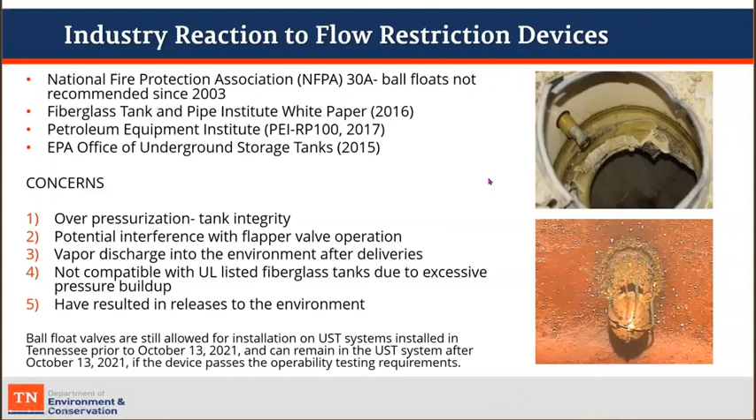Look at that. Oh, so there, that's the latest WebEx, I guess. I'm sufficiently stunned. Yeah, I know. You're not used to that during tank school, are you? No, it works. Nigel, it works.

Don, Rhonda Johnson had a question directed at you, or maybe wanting you to talk about it, but I don't know if you covered it before. Do you see it? I see it, yes. Rhonda, I was actually typing out the answer, but I'll go ahead and respond.

To my knowledge, there are no individual, there are basically two major fiberglass tank manufacturers, and they are represented as members of the Fiberglass Tank and Pipe Institute. But to my knowledge, I haven't reviewed their installer information recently, and whatever they've updated in there now may not reflect what was installed 20, 25 years ago.

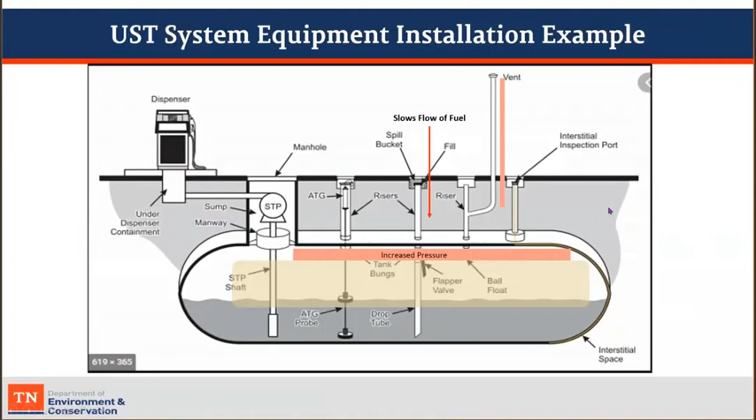Okay, ready for the next slide? Yeah, well, great, pretty much at the end, I just wanted to...